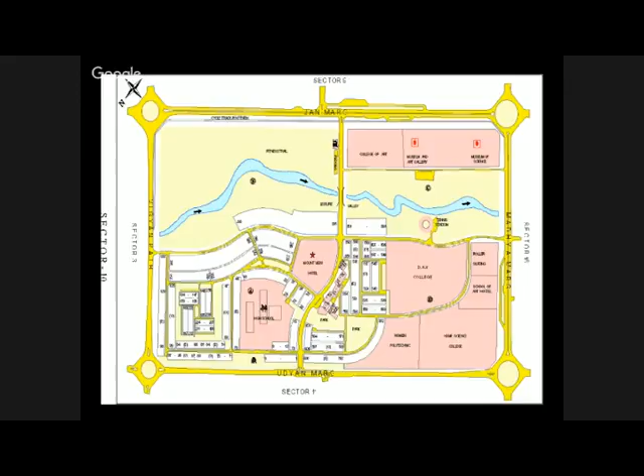Further details about the sectors: V1 comes from outside the city, like from National Highway 1 from Ambala and other sides. When it enters the city, it becomes V2, the major road. V3 will be the road around the sector, again a fast road.

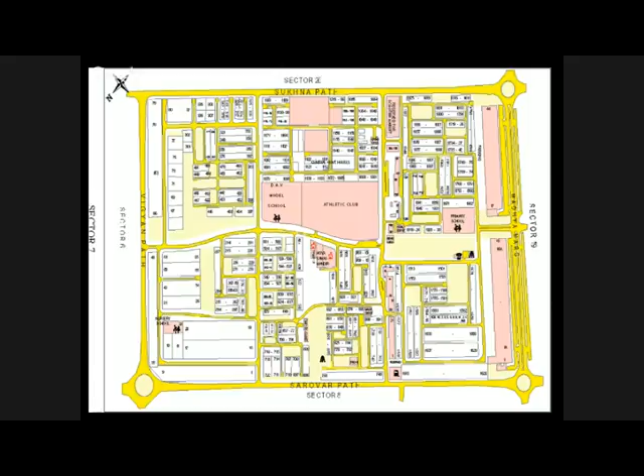V4 and V5 are the two major roads intersecting the sector. V6 will be the road that just reaches the housing, the last, mostly dead-end road. And further, V7 will be the bicycle and leisure path. So these are 7 different types of roads provided in Chandigarh.

Another view shows Sector 17, the city center or downtown, where so far there has been no housing, only offices, banks, and shopping. I don't know whether they have started housing also in this sector—not so far it appears, because the plan was that there would be no house in this sector, which is the city center, and also the bus stand and everything would be there.

This is good planning, very nice planning, which is why it is called the city beautiful on the world scene, particularly because nature has been taken into account and it is being reinforced. Enforcement is the credit to the city. What they are lacking at the moment—actually, 25 years back when I came, some lady was the commissioner.

I gave a talk here, or at the Institute of Engineers, where I said that from all angles the city is fine, but public transportation has not been provided properly. Bus service is there, but it's not based on demand. Demand-based routing and scheduling of the public transport system was needed, and of course metro also should have been provided, along with flyovers at major junctions. That sort of plan I suggested and it came in the paper at that time.

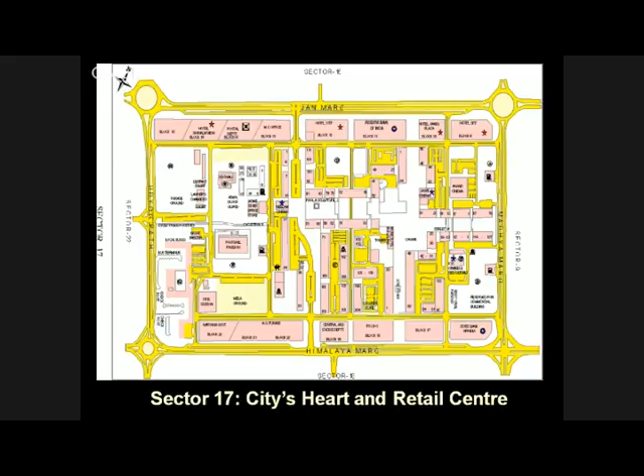So the city becomes really sustainable -- no pollution, nothing like that. Electricity-based metro planning is also something one should do. When planning for metro, they should take care of sustainable, integrated multimodal mass transit systems, and particularly last-mile connectivity. Only then will it be possible to keep the city's status beautiful; otherwise it will be a problem.

Another city I'm talking about is Nagpur. Nagpur is the winter capital of Maharashtra, and it needed improvement. I was made chairman of a committee to develop a project for beautification, electrification, and widening of Nagpur city. With the project manager and the team, we developed it nicely, but the report was just lying there.

The problem normally is you develop a fine project, but then who will implement it? The reports just lie there gathering dust. But luckily, a very dynamic fellow, Dr. T. Chandrasekhar, who was commissioner of MMRDA in Mumbai, was transferred to Nagpur, and I knew him. He saw the report lying there and said, why should it not be implemented? So the report was implemented verbatim, and the next time I visited the city, there was a total sea change, a total transformation.

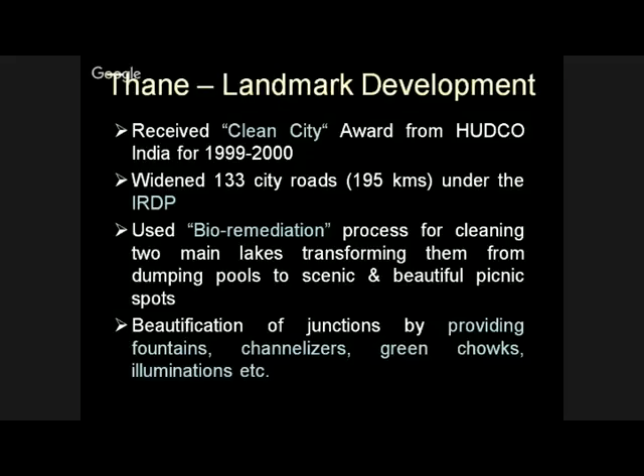Thane, I already told, I think I need not tell again. Clean city, the award he got when he widened all the roads. Dr. T. Chandrasekhar, then the city got the award from HUDCO, a clean city award, and like that, and bioremediation process of cleaning two main lakes. Lakes also were cleaned at that time. But the only problem was that afterward, when he left, again everything came to normal or increased. So that was another problem.

So this is basically it. They have been thinking of planning for a conceptual metro city in the beginning, but the plan was prepared by MSRDC, and then finally it was marketed also, but there were no takers. That's why it's still there.

So one should try to improve on circulation, particularly in the cities, because that is a major problem. Sometimes cities have become so congested that even if you have a car, you will not feel like taking it out. That has become a problem. So one has to make the movement proper.

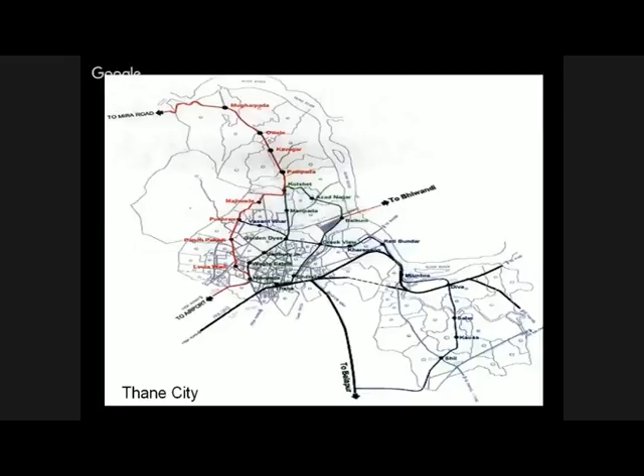I'm not saying for cars, I'm saying for sustainable modes, movement of people, not of the vehicle, not for cars. Only buses, metros, trains like that, and bicycle and walking—these should be encouraged, which are called sustainable modes. I think in your jargon that's what it's called. I didn't know that, okay, that's good.

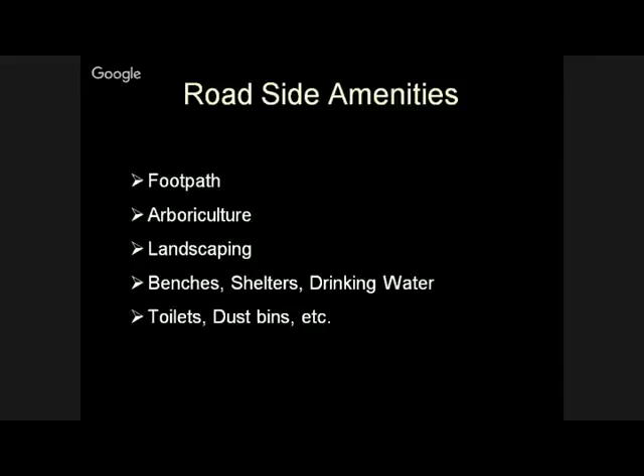Roadside amenities one should provide. Are you clear about roadside amenities? For beautification purposes of any city, you have to provide very good natural things like flowering trees, flower beds, benches, umbrellas, maybe fruit trees better, all through the city. And this should be barricaded so the vehicles do not go onto the footpath, which could create problems.

So movement of passengers should be encouraged, with a very lively, nice, green and clean environment through leisure valleys, as we are having in Chandigarh. That should be encouraged, and the movement of cars, particularly unsustainable modes, should be discouraged. There are many other types of movement restrictions of vehicles that can take place.

So all this I am giving further. The footpaths and sidewalks I already explained. So these are the type of cross sections of the road, typically for an urban road one should provide. One can improve further with which facilities I have added. The footpath, instead of 1.5 meters, could be further maybe 2-3 meters, so that flowering trees, benches and all these things you can provide on the roadside. So life becomes very nice.

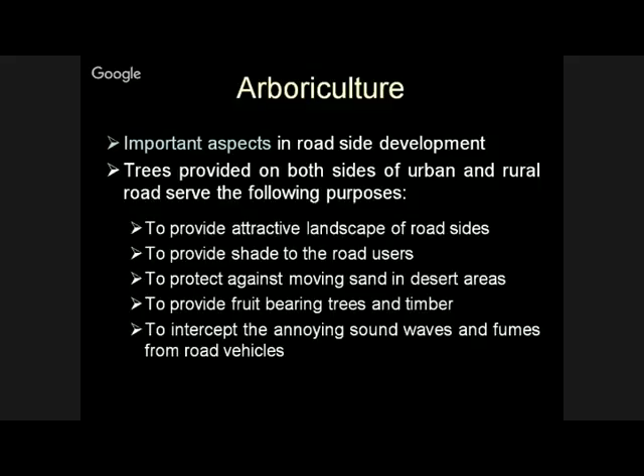So arboriculture, which I have been telling again and again, so that the landscape of the city becomes very nice. Roadside you have to improve upon, and like that. So these are the measures I'm just indicating, one can think of this. A copy of this will be available, maybe you can get it through the center, and then you can enjoy it later.

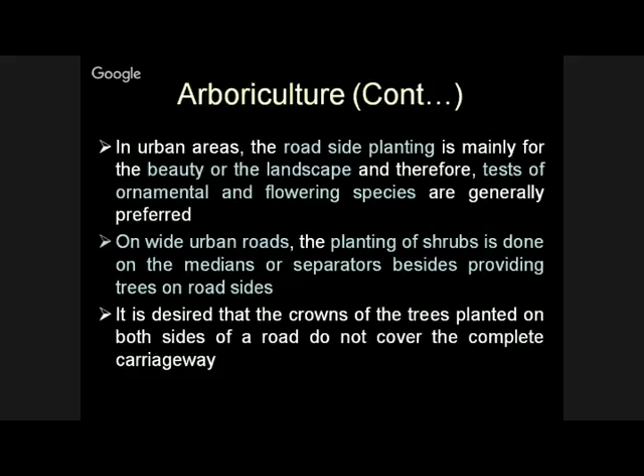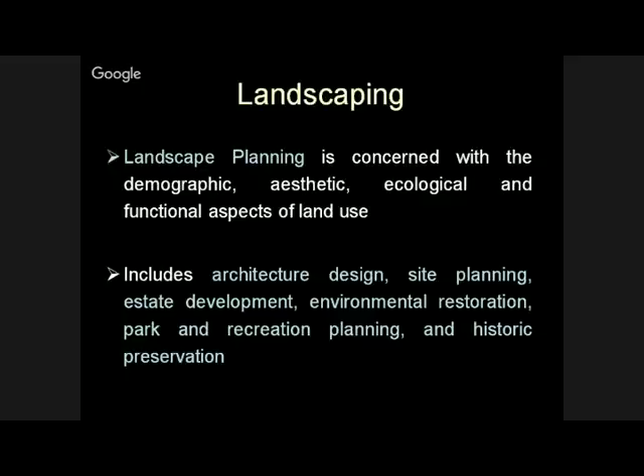Planning of shrubs and all that, okay. Particularly when you are moving on the road, even if it is divided, the divider should have shrubs, colorful ones, and it should not be 1.2 meters where the headlight glare from the other side can be seen. It should be above that height, so the movement is not disturbed, otherwise there's a fear of striking the median itself, that type of thing.

I think one has to do innovation. Every step you take should be an innovative step. That is what one should ensure.

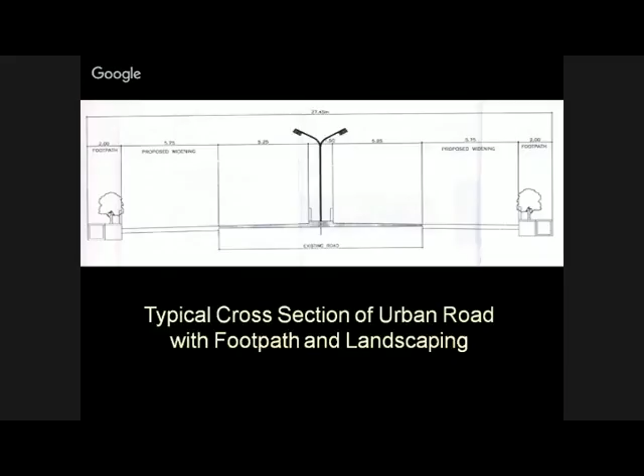Like we were doing the master planning for SVNIT Surat, I was the convener or chairman for this purpose. Actually, they didn't have a master plan. They called us to plan a media center, library, PG hostel, girls hostel and so on. We asked, do you have a master plan? No, we don't have one. Then first we will prepare the master plan. We asked for the 25-year requirement of all the departments, and accordingly we put them together, interrelating them.

Then we found that there are many low-lying areas in the campus where water floods and mosquitoes become a problem. You have to use your ingenuity, some new method. So what we did was develop these low-lying areas into fountains, then provide flower beds all around, benches, shelters, umbrellas. It becomes a beautiful place to sit. This was in the student hostel area, and they enjoy it. Earlier it was a mosquito breeding place. So one has to find a very innovative way to do this so that beautification can be done.

Always there's a question of where the money will come from. For any good proposal, there is no dearth of money at all. I tell you, for a good proposal, there's no dearth of money. Other times we surrender the money because we don't do proper planning. So this is the thing I am telling you, that anywhere you must do innovative stuff.

Otherwise, also for countries like China and India - countries are telling us that China and India are going to be the future economic powers of the world, isn't it? What are we doing towards that? We started planning infrastructure in a very big way over the last 15-20 years. You see express highways, roads everywhere, flyovers, airports and everything. Why did we invest in infrastructure? Because we knew infrastructure development leads to economic development. And so we thought we'll become an economic power by investing in infrastructure in a big way. Fine, very fine. But shall we become an economic power by doing so?

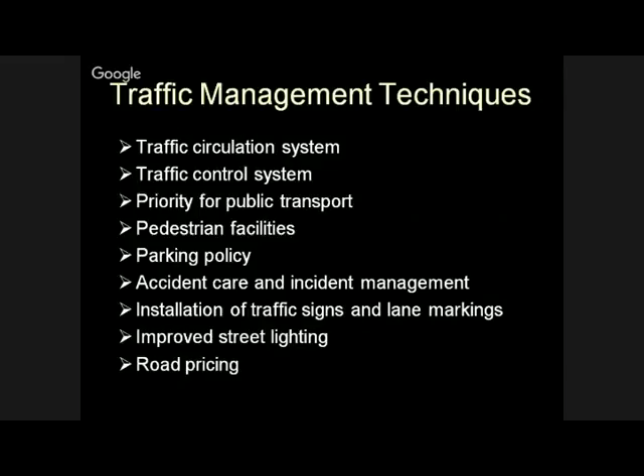Traffic management, with all the objectives, one can learn from here all the different components of traffic management techniques. This is basically for enforcement - once you provide it, you have to enforce it, otherwise again we will have havoc. Circulation plan - definitely for sustainable mode, you have to provide a proper circulation plan.

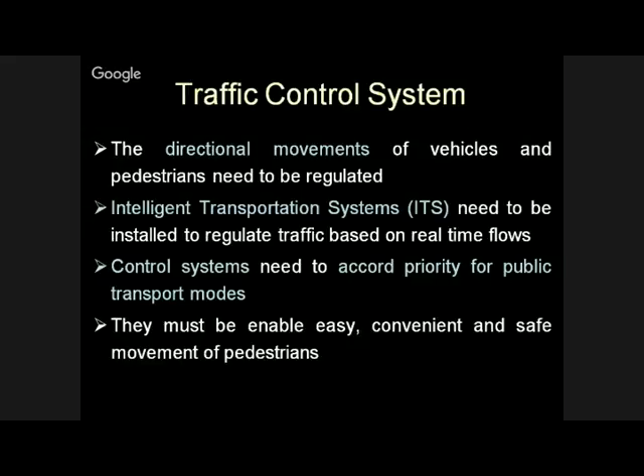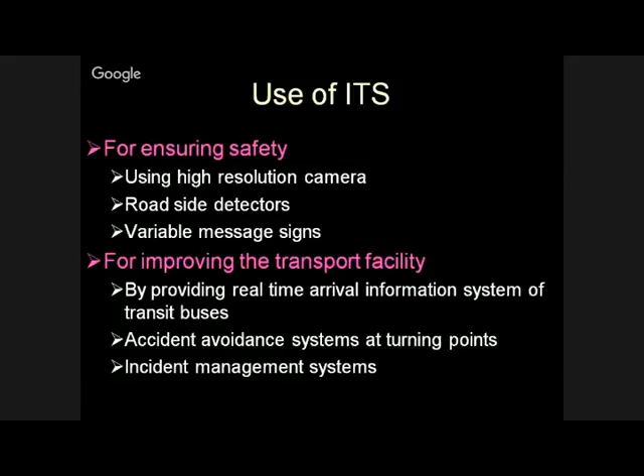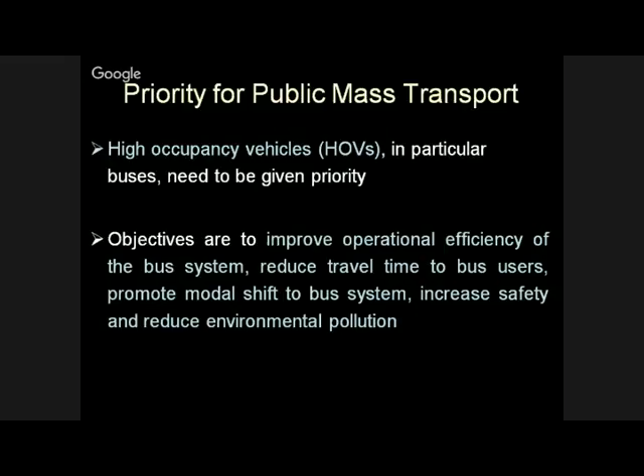Traffic control signals and all that, you can design and properly provide wherever and whenever required. That is important - you delay mostly, that is the problem. And the ITS, Intelligent Transport System - I wish I could have shown you some examples, but time is not that much. For safety and security, many problems are solved when you go for ITS - the cameras, CCTV, and intelligent lighting. As you enter, lights will automatically be there, otherwise no.

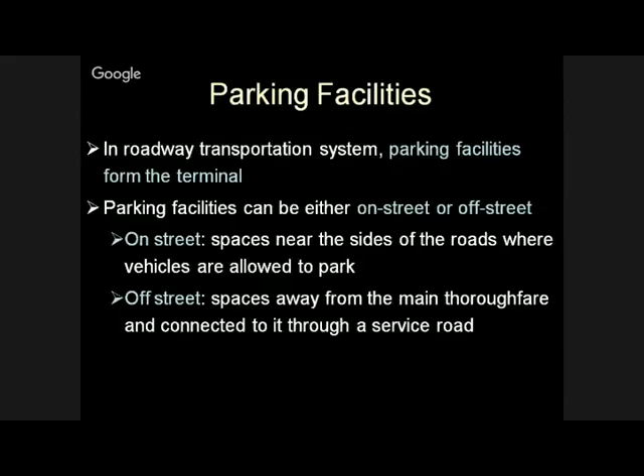So public transportation should be encouraged. Parking facilities should be provided, but minimum. Movement should be there - if you are starting from your home in public transport with a feeder system and last mile connectivity, why do you even need a vehicle? But it should be comfortable, the level of service should be really superb. Let's give something very nice like the metro, very air conditioned, good seating and all that. That type of thing we have to give. All these are the facilities.

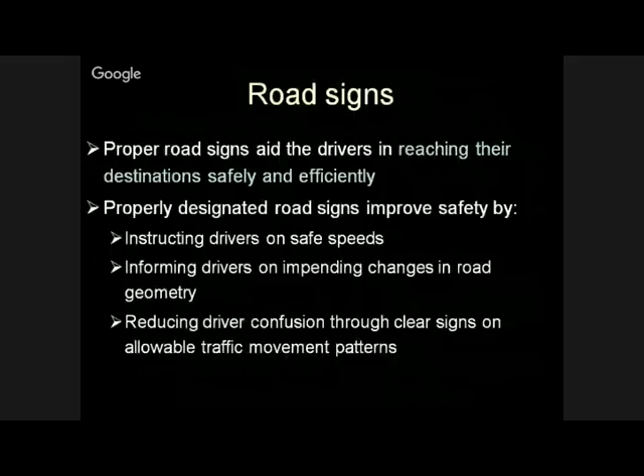I think parking demand, traffic control devices, road signs - these are basically all the traffic type of variable message signs. See, anytime a disaster occurs in the city, you should have 30-40 VMS in the city immediately conveying the message that this road is blocked and this and that, and they should take the other route like that. That sort of thing is also required.

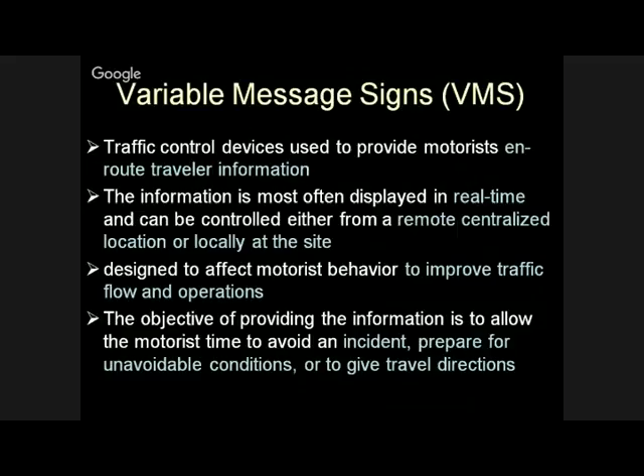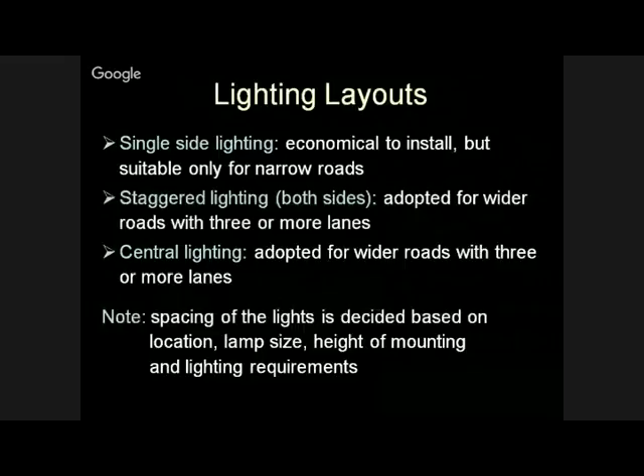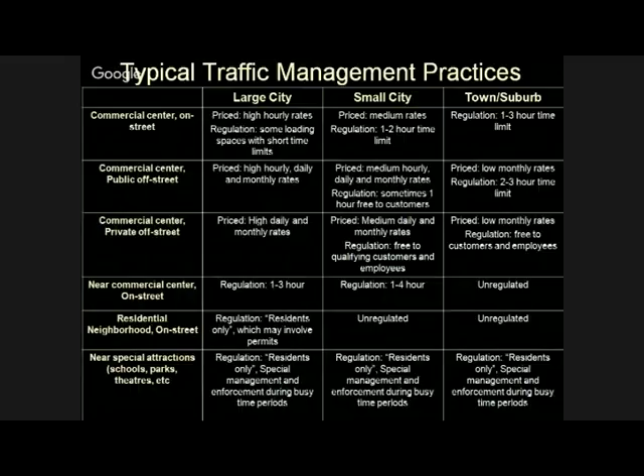Urban signs and all that, traffic signals, street lighting - lighting should also always be in proper order. Lumens, whatever specified, should never be less than that. Spacing, parking management - I think these are some of the major practices which are there. One should follow these for different types of cities, different types of parking and traffic management practices.

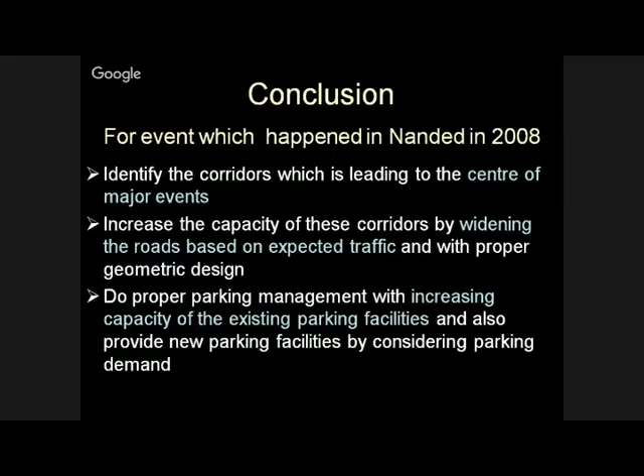I thought I could give something really useful, the way whatever I learned, I could give in a small way. Of course, maybe sometime later when I come here, I can give a very detailed planning for smart cities and sustainable infrastructure - smart, beautiful, with sustainable infrastructure. That type of topic, if somebody is interested - I'm giving a talk after this in PEC, maybe if you're interested I can give that. With that, I thank you very much.

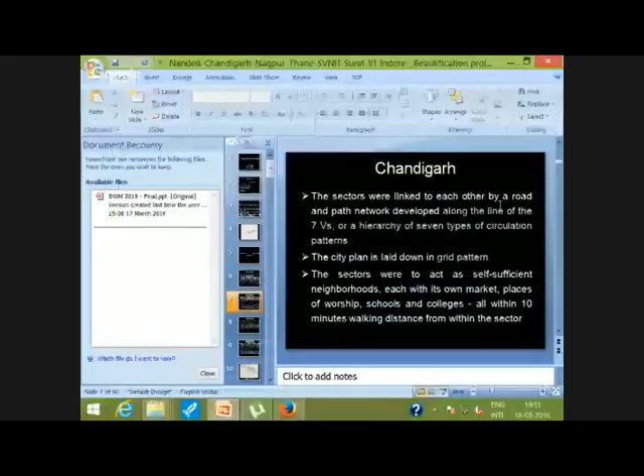So this is a smart city, but I'm not giving here. You already got it, is it? Everything. So maybe this is okay, fine. Okay, thank you very much. This was my pleasure to be here, and thank you, Dr. Sharma.